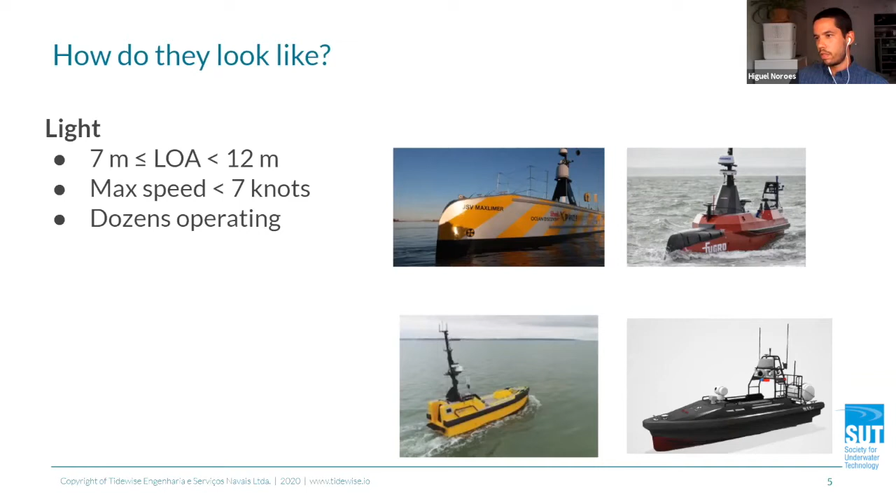And the last one is large, which are boats above 24 meters and 100 gross tonnage. You have very few prototypes running around the world, but you have dozens being built. And also you have one which is 78 meters long - the prototype is already built, and is due to increase the level of autonomy in the next decades, reaching full autonomous configuration in the year, if I'm not wrong, 2030, 2040.

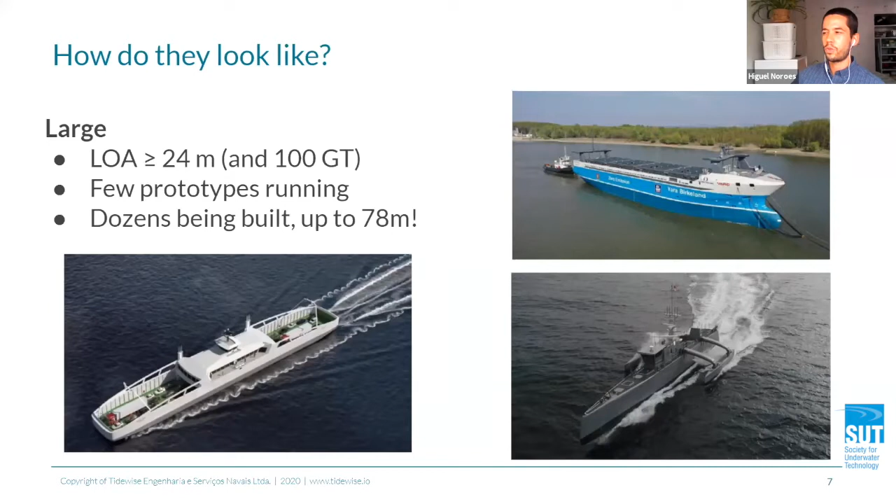It's a common question that we receive here in TideWise when we talk with our clients: how smart are they? How smart are those USVs? So IMO sets a degree of autonomy table, which has a lot of levels to define how autonomous they are.

You can see that the first one is a ship with automated process and decision support, where you have the crew on board doing most of the tasks inside the boat or ship, and you have some autonomy control functions such as autopilot and things like that.

Let's jump into the last level: fully autonomous ships, where you have no crew on board and the system can do decisions and determine actions by herself.

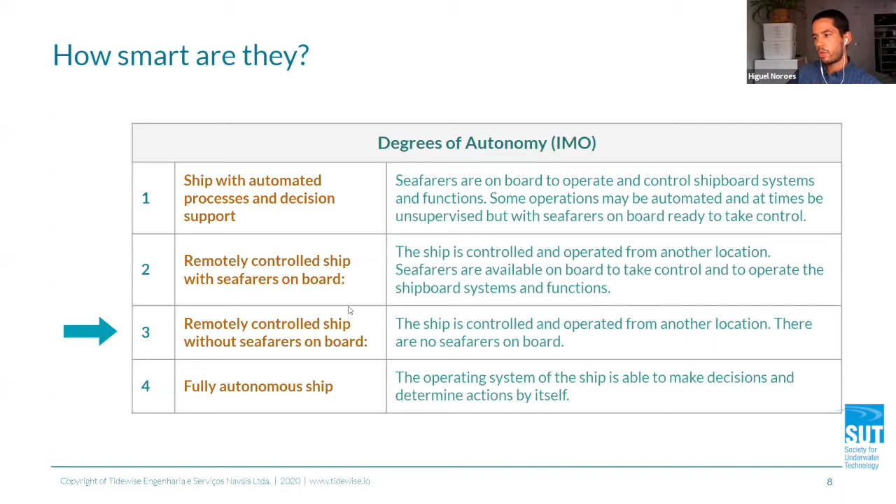The two levels in the middle here are remote control, both of them. The first one, number 2, is a remote control ship with seafarers on board, so people are on board doing maintenance work for example, but you can have some controls and operations that are designed by the control system, by the control functions. And the third level is a remote control ship without seafarers on board, so it's a better level of automation.

The USV Tupan from TideWise is just under 5 meters. That's because we have special regulations in the flag state of Brazil, in which things are simpler to operate boats under 5 meters. You can see that the displacement of Tupan is 1,200 kilos, fully laden. For the naval architects in the audience, you can see that the displacement is quite high for the size of the boat, and it's very common on unmanned systems.

The propulsion is diesel electric with 2 props, a driveline, single drive lines for each prop. The props are fixed pitch, and you have 4.5 kilowatts each system, each prop.

This configuration is the best one that, in our experience, we find for the types of jobs that USV Tupan does. For example, you can see that the endurance is up to 7 days. This is doing mainly survey work, which you go for maybe 3 to 4 knots of speed, so you can be up to 7 days. And also for jobs in which the speed fluctuates a lot, having a diesel electric configuration is quite good.

The electrical motors are good for a fine level of control of speed. And they are getting energy from the battery bank, which is charged by the diesel genset. So the maximum speed is 6.5 knots. We have a payload maximum power of 1 kilowatt.

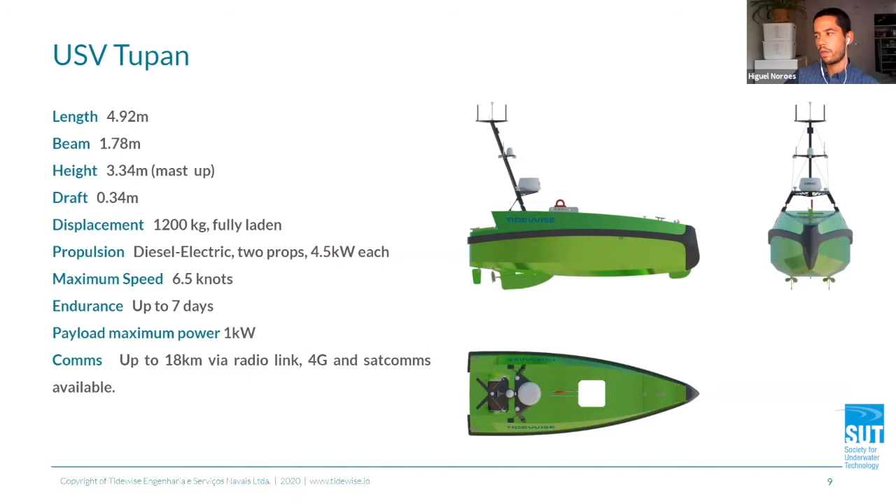The communication can be, when you have line of sight, via radio link up to 18 kilometers. And you have the mobile network as well - if something goes wrong with the radio link, you have 4G. And of course, if you want to do jobs with over the horizon operations, so you don't see the boat, you can have satellite communications as well. This increases the cost of the operation. The trend in the market is that the cost is going lower and lower for satellite communications, but some clients do need this functionality.

TideWise is a company based on 4 pillars. We provide data and we provide more value because our boat can stay longer in the sea, and our boat is capable of having less motion as it has an active compensation system for less roll and pitch. So the quality of the data that we collect is more valuable.

We provide less risk as you don't have any crew on the sea, so you have less risk of injuries and any problem that can happen with people, seasickness for example. And you have less environmental impact because the same job that you perform with a conventional boat, you do with an unmanned system that is smaller and consumes less power, burning less fuel, right?

So what's the application, right? So what for? Why do we have autonomous vessels? They are mainly used to perform repetitive, hard, dangerous, or costly tasks in the sea.

Let's talk a little bit about the applications we see very commonly. The first one, of course, is bathymetric survey. It's the main one right now. You can fit the USV with a multi-beam echo sounder, sub-bottom profiler, a CTD, and as I said before, our system is equipped with an anti-roll system. You can see that most of the vessels coming up have some type of configuration to dampen the motions. This can be in the design of the hull lines or even an active system like ours.

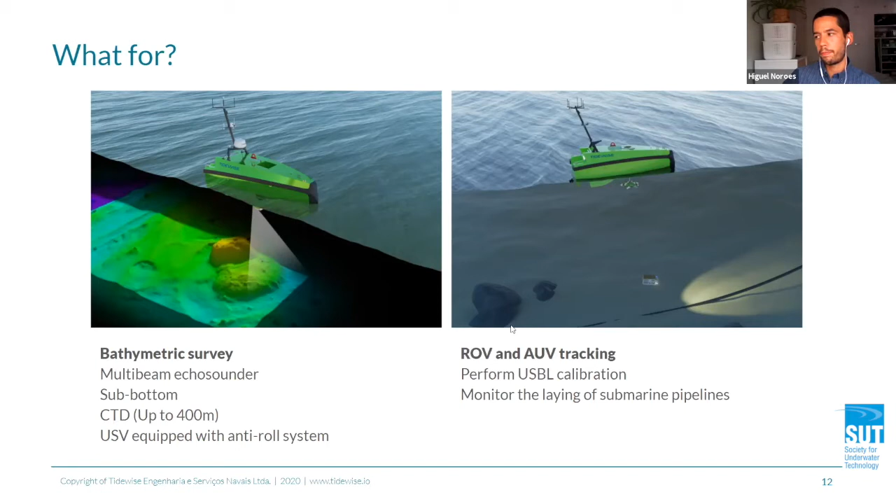Next one is autonomous draft reading. At TideWise, we have our own draft reading algorithm. It's the first in the world developed specifically for a USV. This type of job is commonly done with people on board next to the side shell of the ship. It's a very dangerous job, but the USV can be fitted with cameras and algorithms capable of defining the drafts in the bow, midship, and stern. So this can be made automatically.

Next one is environmental monitoring. We can do metocean data collection. We can serve as a drone-based platform. You can fit a fluorescence sensor to check for oil. You can have an ADCP, a LiDAR for wind. You can measure wind and use that for offshore wind farms that are popping up right now. It's a very hot topic in Brazil, especially to measure and define the potential of good locations to install offshore wind farms.

And you can do inspection and monitoring. You can collect images which are geo-referenced. You can have LiDAR to inspect structures, cameras, multi-beam echo sounder as well. You can use this for oil rigs, oil platforms, buoys, any infrastructure that you want to inspect and monitor.

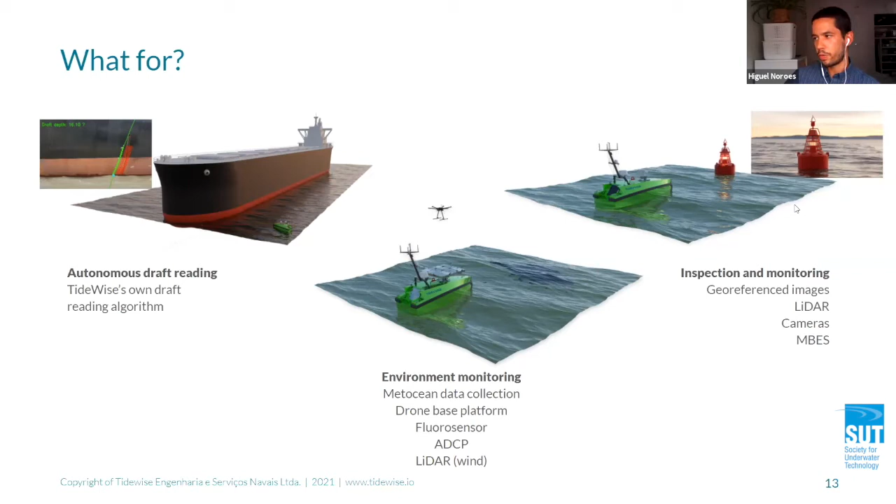So, applications by location - if you think about harbors, you can do survey, because some harbors rely very much on dredging. So every time you do a dredging, before and after, you need to do a survey. You have surveillance as well for safety - in Brazil, we have some ports which are not very safe, so you need to monitor those areas. And as I said, draft marks reading.

For the coastal context, you can have survey, of course, and aquaculture monitoring as well. In Australia there's a lot of aquaculture; in Brazil it's rising. You can monitor those aquaculture farms as well. You can have mammal monitoring - you all know the regulations, if you're doing drilling operations and you spot a mammal nearby, you need to stop the operation. So the USV can be fitted with hydrophones and microphones to check for mammals. You can do environmental monitoring, like water data collection, water quality collection, and you can do cargo transport as well.

For the offshore situation, you can do underwater survey, doing survey of an FPSO for example, without needing to take the FPSO to a yard - you do it alongside the ship. You can use an ROV or AUV to help this job. You can do oil spill monitoring, metocean data collection, cargo transport between platforms or between wind turbines in an offshore wind situation, and USV and ROV subsea inspection as well.

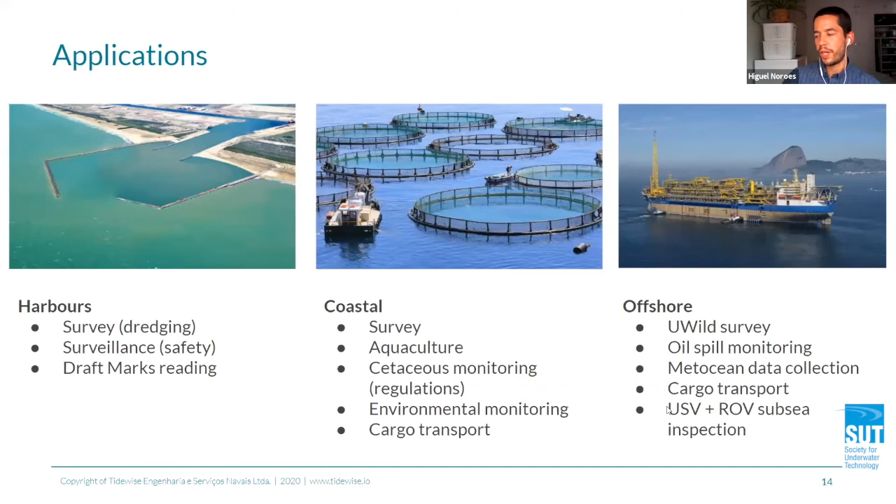There is also the application of oil spill monitoring, in which TideWise has good experience. We just finished a demonstration of a prototype last December. We integrated an autonomous drone fitted with visual and thermal cameras to check oil spills. The drone was developed in partnership with a local university, Federal University, and our USV served as a base platform for the drone to land. The USV was also fitted with a fluoro sensor to check in loco the presence of oil in water.

So I'll play this 3-minute video just to show you how it was.

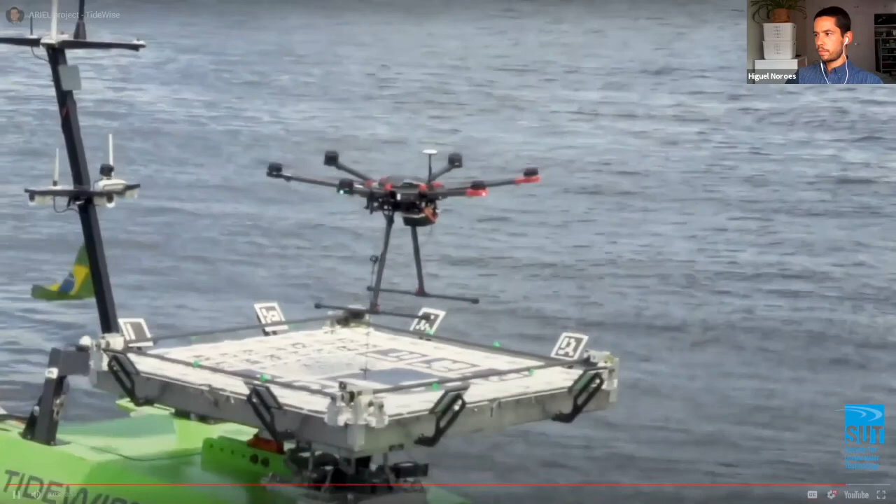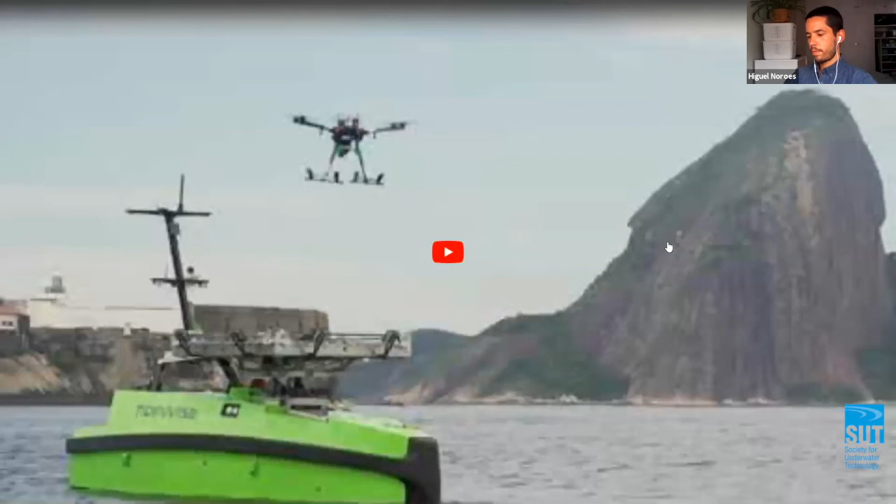So let me go back to the presentation.

As you can see, this project's client was Repsol Sinopec Brazil, part of the Repsol group here in Rio de Janeiro, Brazil. As you may have seen in the last scene of the movie, the drone was also fitted with a tether system, which could provide high autonomy for the drone flying. The drone could fly for up to 5 hours in a row.

It's a very good project, I'm very fond of it. We had the pleasure to work with Stable, a company in Norway who develops stabilized platforms, which was very beneficial for the drone landing. It was really good, and yeah, I'm very fond of this project. You can check more on our website.

So let's talk about the regulations. Right now, up to 24 meters you are non-SOLAS, so you can only use the flag states. Of course some countries do not have the flag states yet defined for autonomous applications, but most of them are already defined. The International Maritime Organization is planning to issue the first regulations in 2023.

Right now you have the guideline, which is widely used by the industry, which came from Maritime UK. As I said before, it's a very good guideline, you can check it on their website. Now, a good point is that insurance companies are covering USV applications, and the man-in-the-loop is the most common operational concept right now. It's very unlikely that you will see an autonomous vessel or ship operating without a man monitoring what is going on.